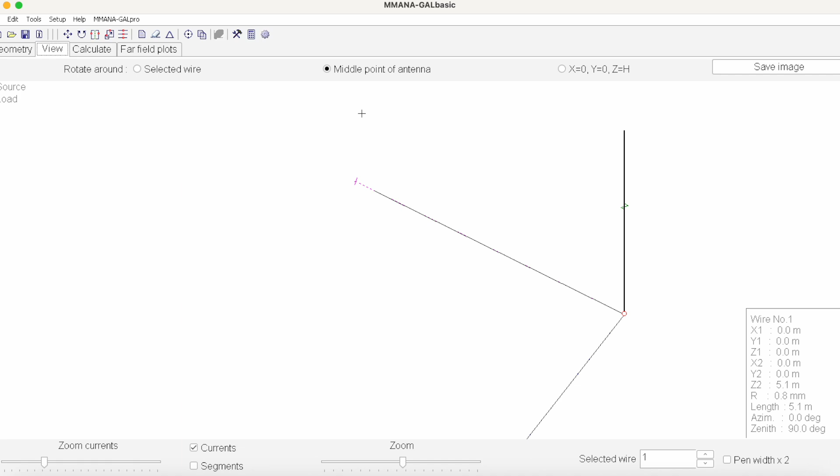So here, let's say this is the POTA PERformer. Let's say for 20 meters, so 5.1 meters up, 5.1 on this direction, 5.1 on this direction. Let's feed it in the center, so you can see. This shows it. So two radials, 90 degrees. Feed it in the center. Let's add 1 meter of height with copper wire and with a normal ground setup without radials. So let's see.

SWR 2.44. We can adjust this quickly through the length of the first wire, for example, and the length of the two radials as well. Let's make them all equal. It's not the optimal solution, but it will work. Let's go for SWR. Try to optimize it.

It's a bit slow on my MacBook Air because this is a Windows application. It's running through Wine, so it's searching for the best length.

And yeah, with equal lengths we have an SWR of 1.4. That will be good enough for real world operation. So what can we see here? As expected, a bit more radiation in between the two radials. So how much is this? Let's calculate again. So we see laterally 0.6 dBs, and here in between the two radials 1.2 dBs at 26.4 degrees. So this is the PERformer.

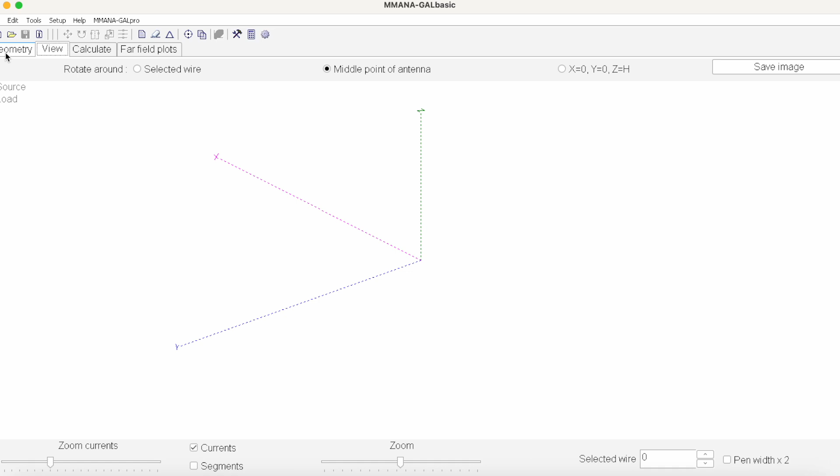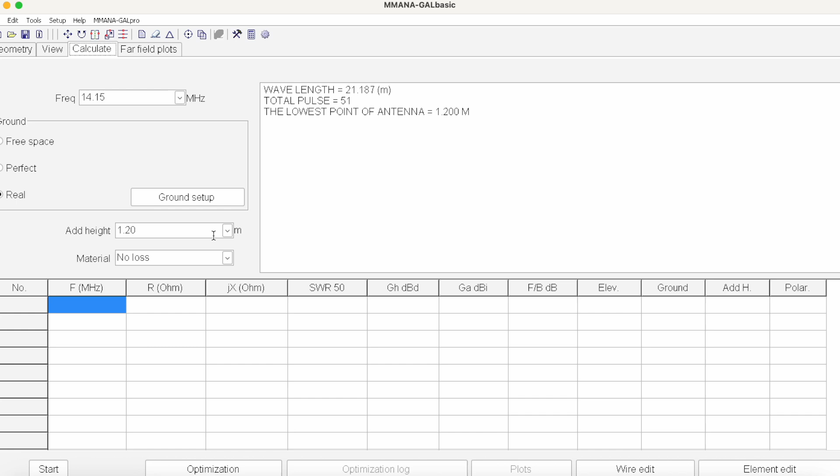Now, my reasoning. So we can start by putting only one radial, like so, and same setup, 1 meter high, copper wire, no radials on the ground. Let's calculate like this. It's maybe too short. Let's see, 5.2 minus 5.2, 1.68. Okay, let's optimize for the purists over there. So position 2, associated 1 here for SWR.

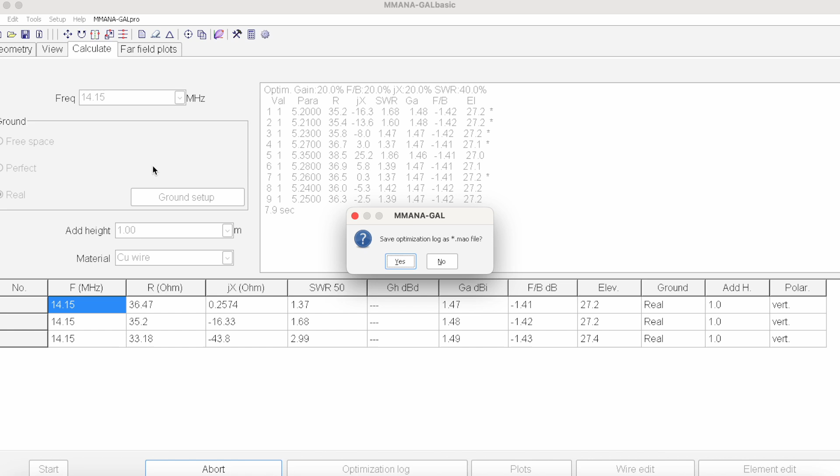With only one radial you have a little bit less SWR. So 1.37, and what do we see? So 1 meter, the other antenna, the PERformer, is also at 1 meter. We see that it's in this direction that we have a little bit more gain, in the direction of the radial. So to be able to see it here, I will just put the radial on the x-axis, like so. And now if we calculate, it's the same, but the gain is coming here.

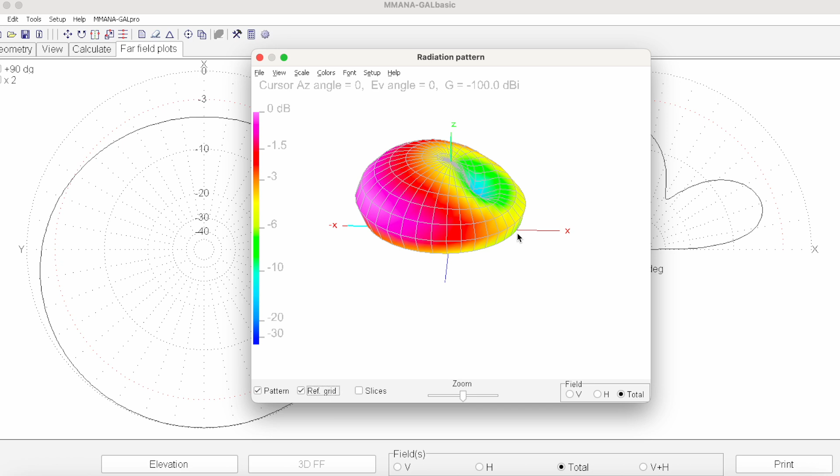So just to see the 3D model of it, so I can be sure of what I'm saying. Yeah, so more radiation to the side of the radial. So, talking about numbers, we have 1.5 dBs at 27 degrees. So here we have maximum of what? I already forgot.

So here we have a maximum of 1.2 dBs at 26 degrees of takeoff angle, which we know is important for DX, so the lower elevation the better it is. So this is the PERformer, 1.2 dBs, 26 degrees. And with only one radial, you have 1.47 dBs at 27 degrees. So 0.6 degrees of takeoff angle difference, which for me in the real world is the same. And a bit more gain between 1.2 and 1.47. It's not very different.

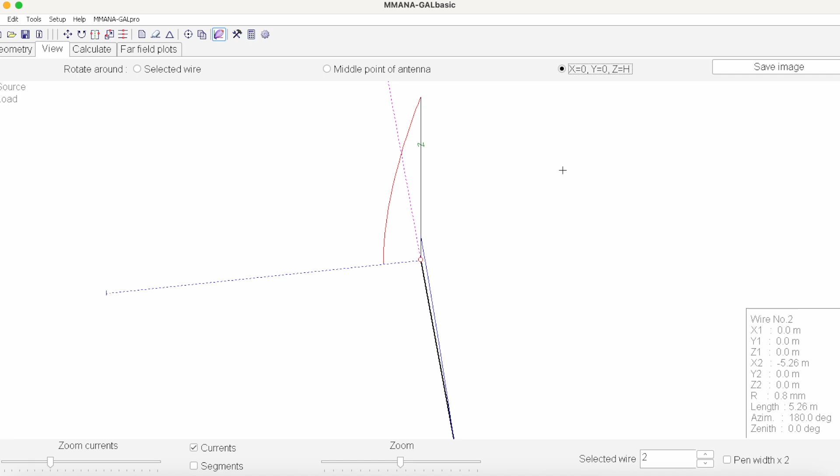So it's a lot less hassle to have only one radial to mount. Okay, so it's one support less, one wire less. If you have a linked PERformer, it's one radial less to tune, to change links if you want to change bands. So this is it. This shows that this is virtually the same. It will not change anything.

But now I would like to explore another idea. And the other idea is most of us have like a 7-meter mast or a 10-meter mast. There are several 10-meter long masts that are good for portable because they collapse to 70 centimeters. And so it's very easy to have a mast that is 10 meters tall. So the question is, how can we improve the performance of the POTA PERformer with a 10-meter mast and easy deployment?

Can we do better than this? And I think we can. And I'll show you the solution that I use, that I've used several times, and that works nicely. So I think I will start from this. So if we have a 10-meter mast, the vertical wire can start at 10 meters high. Okay, so to leave a bit of margin, let's say that the center of this antenna will be at 4.5 meters. Okay, so 4.5 plus 5.2, 9.76 meters at the top, which is a realistic height of a 10-meter mast.

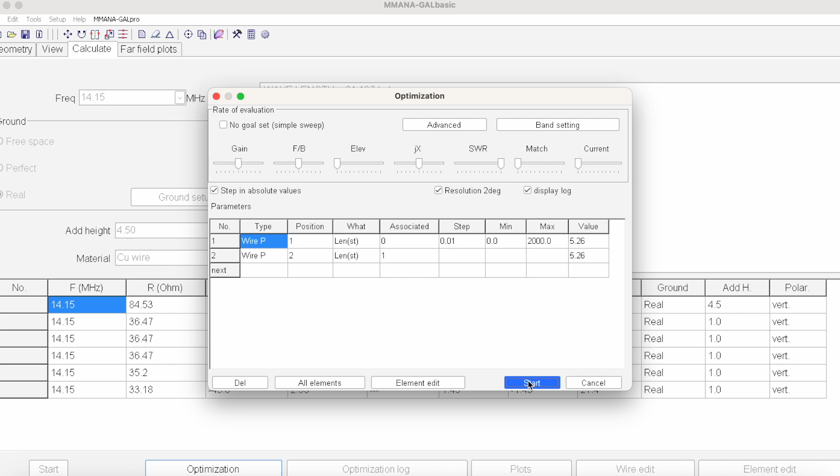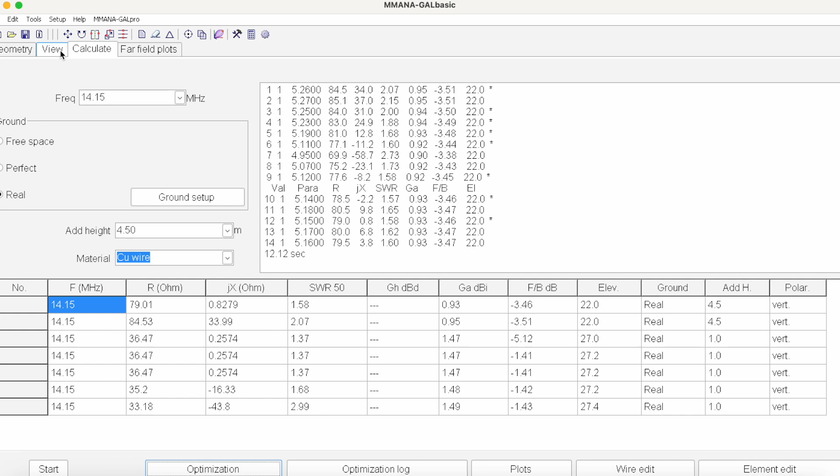And now it's adjusting the lengths of the radial and the vertical section. Now we have a more reasonable SWR, 1.58. And what do we have here? So what we have here is an antenna that has a similar pattern that we saw before. Slightly less gain, 0.93, but 5 degrees lower. Okay, so 5 degrees lower. It's also more directional,

and for me this is an antenna that, so there's a bit of a trade-off between ease of installation. Well, that's not what I want to say. That there is a bit of a trade-off between elevation angle and gain. Okay, but if you want to optimize for elevation angle, you need to put the antenna higher. Okay,

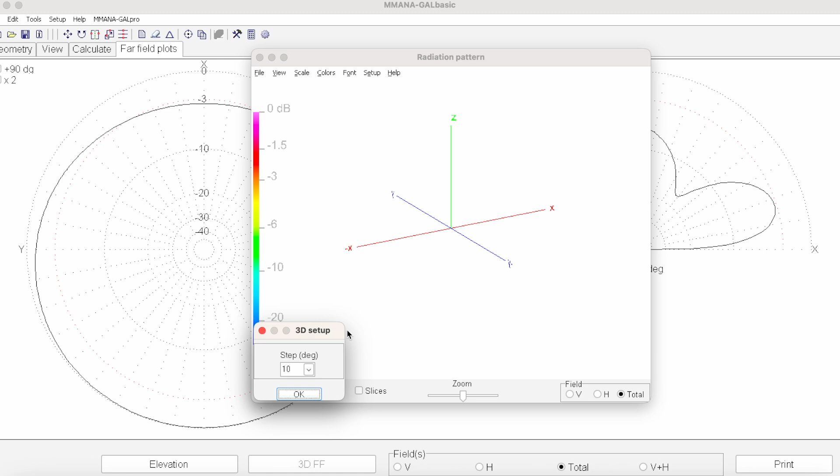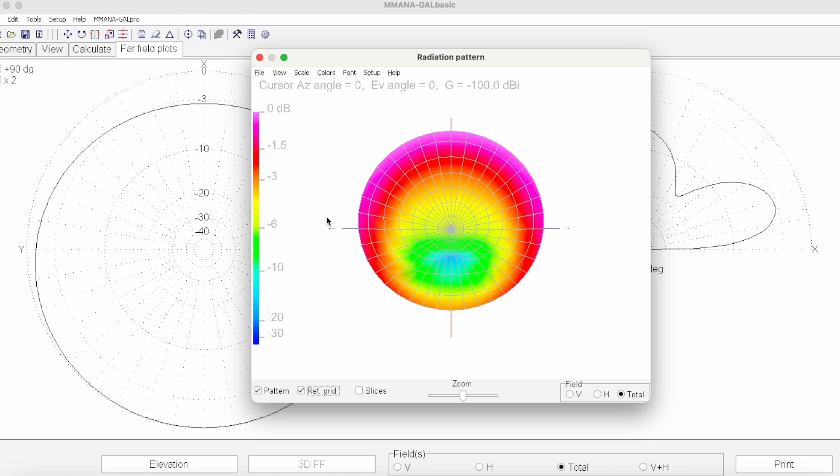so the radiation pattern looks like this. It's a bit directional, but still 180 degrees wide horizontally. Still a lot of gain, okay? Still around 1 dB gain, so the PERformer has 1.2. The PERformer is at 26.4 takeoff angle, and here we are at 22 degrees angle, so a lower angle, better for DX.

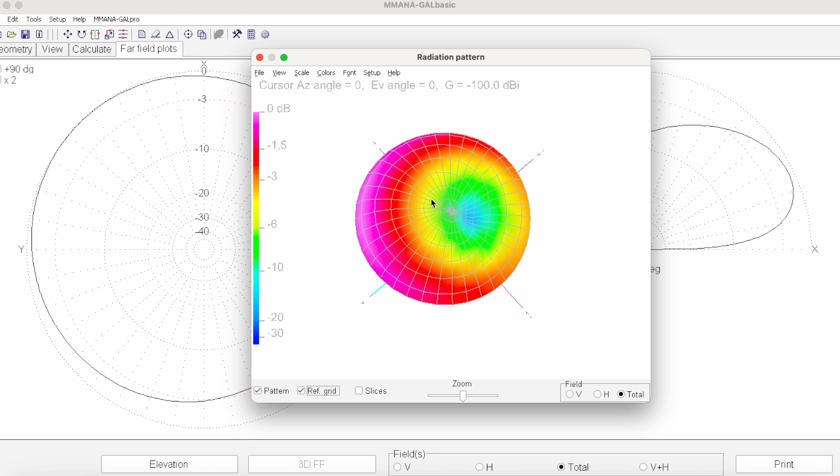Will you see real differences in the real world? Maybe not. But I personally prefer this second solution because it's more directional. So if we see the diagram of the POTA PERformer, it's basically the same, but it has more gain to the back than my solution. So we have a front to back of 0.65, and here on my L antenna you have minus 3.46 dB, so a lot more rejection.

So if you are trying to work a specific direction with low takeoff angles, or the lowest possible for the height of your mast, you can think about using this solution. And for me the real advantage is, with a layout like this, you can just put some meters of rope at the end of the element that goes down, and you just stick the rope on the ground. I think this is easier than having a separate 1 meter rod or mast or trekking stick to have a 90-degree angle radial. And I just like this solution best.

I think a higher antenna is always better. It's always better to have a lower takeoff angle. And so this is what I use. I have different versions of this antenna, and what I think is interesting in this layout is that you can elevate it even further for higher bands. For example, let's just quickly explore the 10 meter band. So 28.5. This will be roughly 2.6 here, and on the other wire 2.6 as well.

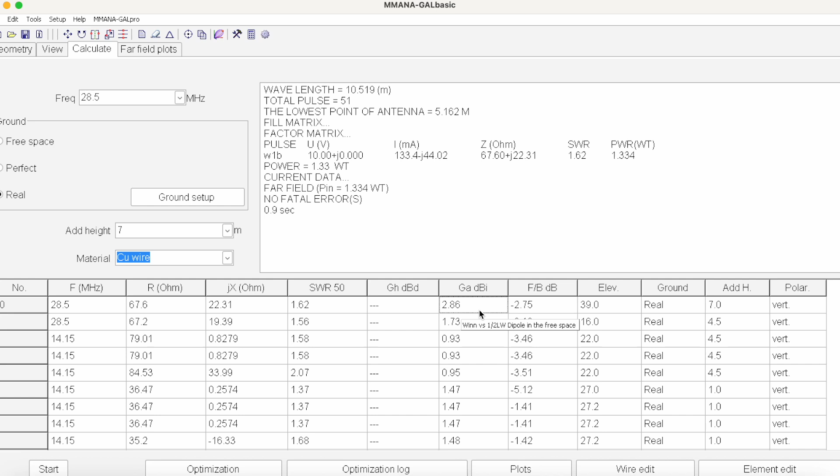And this time, because we have 2.6 of length, we can put the antenna even higher on a 10 meter mast. So let's say we put it 7 meters high, to fully explore the 10 meter mast. So reasonable SWR, we have a higher gain, of course, and it starts to be a bit more complicated because the antenna is more than half wavelength high, so we start to see different lobes.

But the truth is we have a very low takeoff angle lobe at 1.6 dBs and 12 degrees takeoff angle. So an antenna like this is really good for DX, with a very reasonable gain and a front to back of 2.75 dBs, which means we are starting to see some real rejection of signals from the other side.

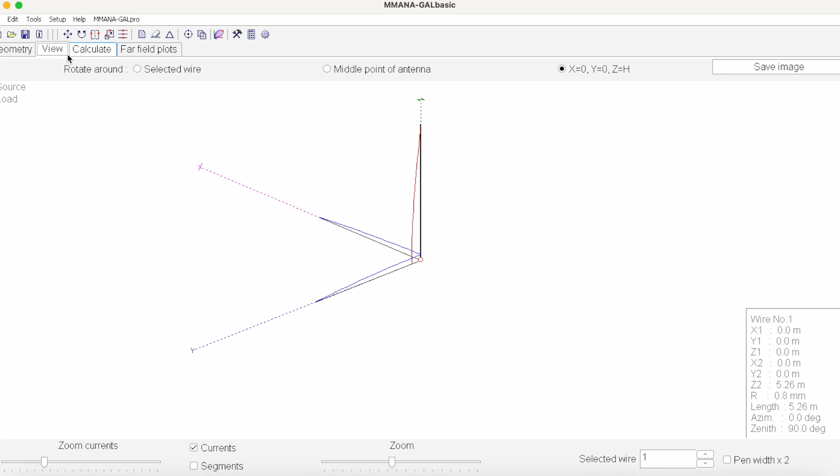If we compare this to the PERformer for the 10-meter band, let's go like this, 2.6 in here, 2.6, 2.6. We calculate SWR 1.5, 1.38 dBs, but the elevation is still 24.8 degrees, okay?

So the higher we go in bands, the better it is to go away from this design and adopt a design that is more like this, mounted higher on a 10-meter mast. I'm focusing on the 10-meter mast because I think that is an easy thing to get, not too expensive, and perfect for portable in terms of height and transport length. So these are my thoughts, okay?

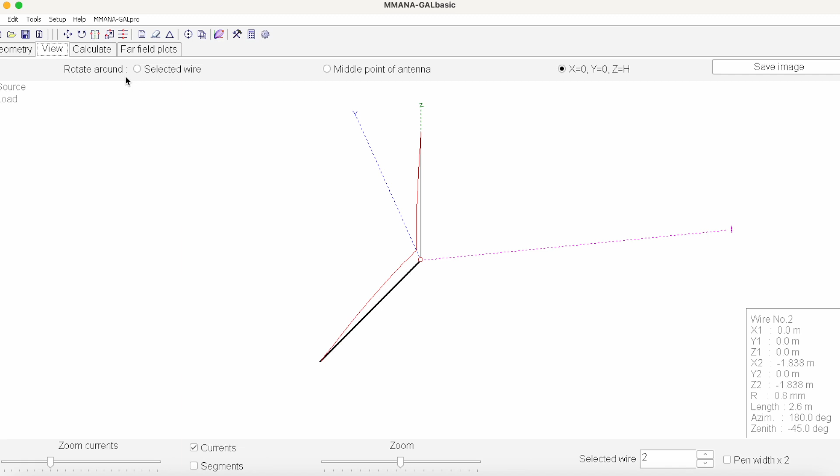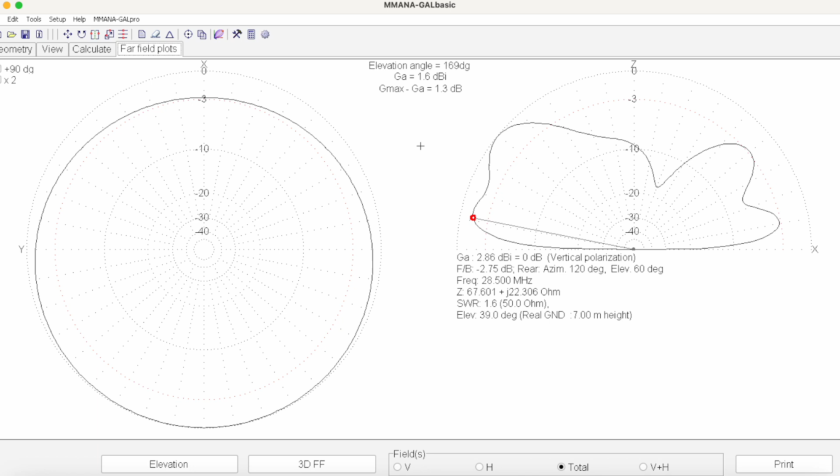We can see here we have another lobe on the L antenna that goes almost 3 dBs, higher takeoff angle, of course, but it can also help to work more stations at different distances. So 1.3 dBs here at 12 degrees, and here 1.38 dBs, but 25 degrees.

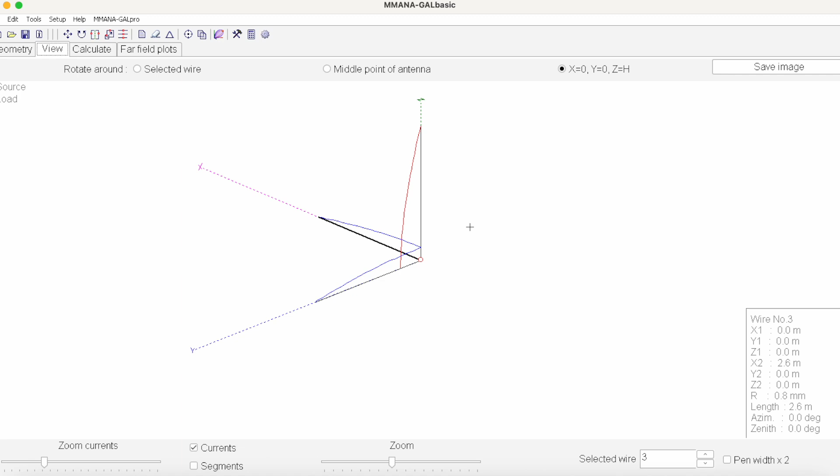I wanted to share this with you just to open your mind, so the POTA PERformer is good, but it's not good for everything, for every band, and especially if you want to have a simpler setup, you can consider this L antenna setup. Okay, these are my thoughts today that I wanted to share.